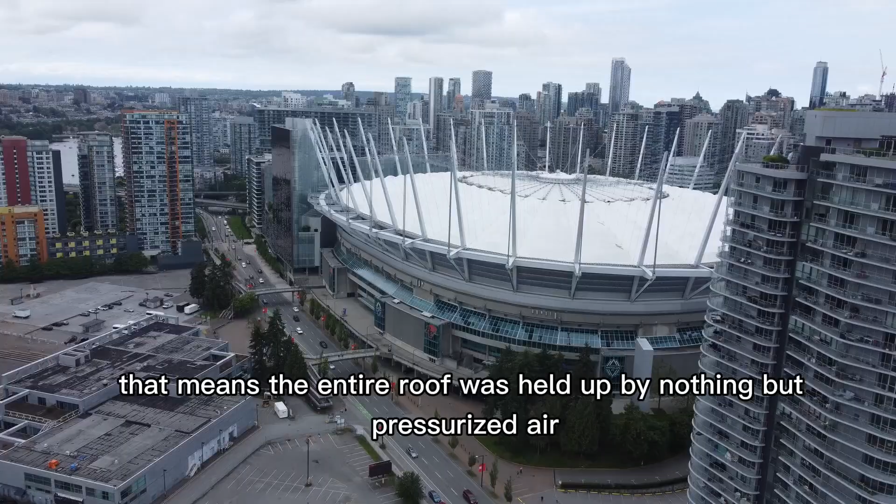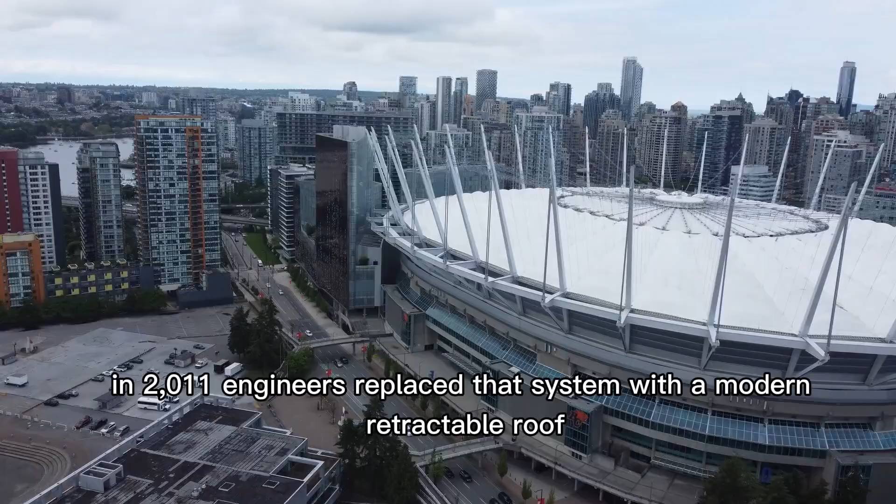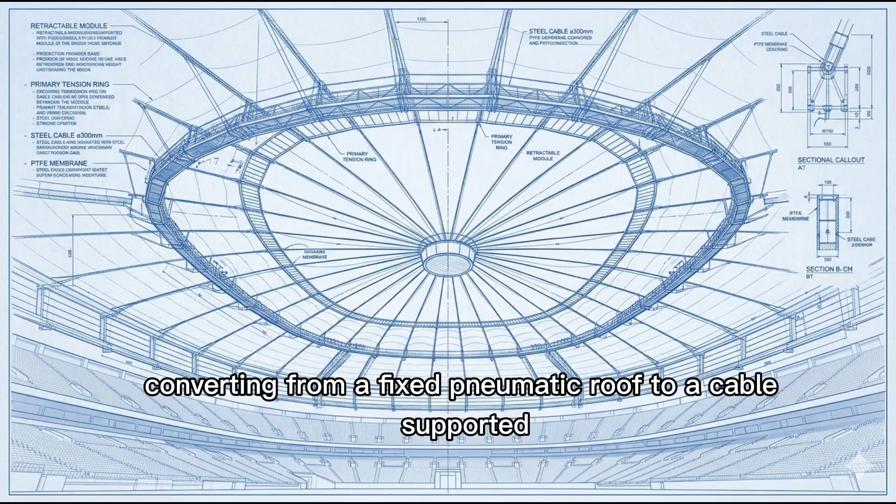BC Place originally opened with the largest air-supported dome in North America. That means the entire roof was held up by nothing but pressurized air. Essentially, the building was inflated like a giant balloon. In 2011, engineers replaced that system with a modern, retractable roof. But the legacy of that original pressure dome design still defines the structure's dimensions today. Engineering note: converting from a fixed pneumatic roof to a cable-supported retractable system without demolishing the existing concrete bowl is an extremely complex structural intervention.

Seattle, Lumen Field. Capacity approximately 68,000. This stadium is notorious for one thing among engineers: noise concentration. The roof structure, partially enclosed on 3 sides, acts as a parabolic reflector. Sound doesn't escape. It bounces back onto the field. NFL players have described playing here as disorienting. The crowd becomes a structural element.

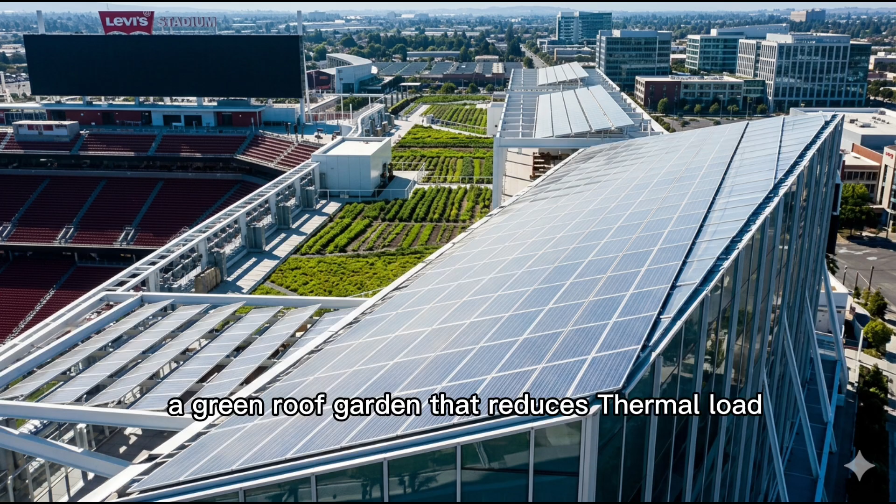Levi's Stadium, Santa Clara. Capacity, 68,500. Silicon Valley built a stadium, and it shows. This venue was designed from day one as a smart building. 5G infrastructure embedded in every section, a green roof garden that reduces thermal load, and a solar panel system that generates more electricity than the stadium consumes on event days. Levi's Stadium is, energy-wise, net positive. That's exceptionally rare for a venue this size.

And then there's Los Angeles, SoFi Stadium, $5.5 billion. The most expensive stadium ever built on Earth. But here's the problem FIFA handed the engineers. The NFL field inside this building is too narrow for football. FIFA requires a pitch exactly 105 by 68 meters. SoFi Stadium's NFL configuration was about 4 meters too tight.

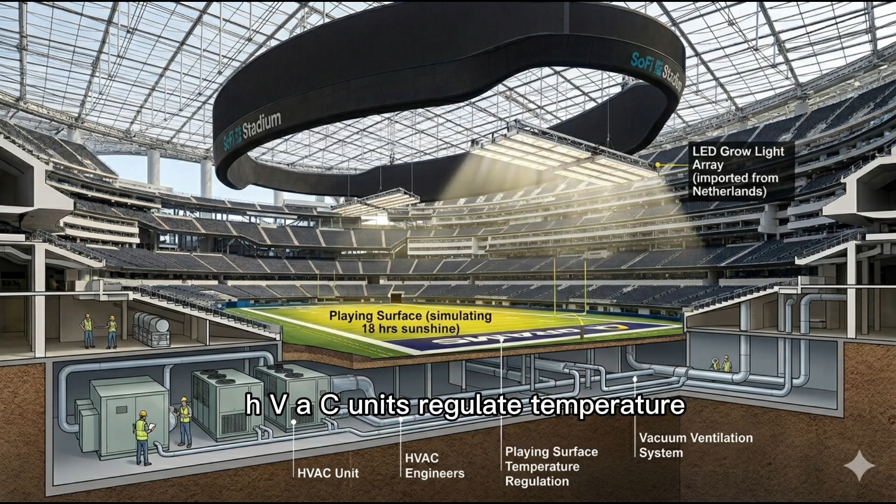The solution? Remove over 400 seats from the corner sections, physically dismantle part of the structure, and then grow real grass inside a semi-sealed building with no direct sunlight. The engineers installed a vacuum ventilation system beneath the pitch. HVAC units regulate temperature across the playing surface. Giant LED grow lights shipped in from the Netherlands simulate sunlight 18 hours a day.

And above all of that, suspended 122 feet in the air, hangs the Samsung Infinity Screen. 70,000 square feet, 80 million pixels, the largest video display of any stadium on the planet. Its brightness is strong enough to be visible through the translucent ETFE roof, from aircraft descending into LAX. SoFi Stadium isn't just a venue. It's the most complex temporary engineering transformation in World Cup history.

Guadalajara, Estadio Akron. Capacity, 49,850. Look at this building from the outside. The exterior cladding was deliberately designed to mimic volcanic rock, a tribute to the region's geological landscape. Those panels are not standard concrete or steel. They use a specialized textured composite system to achieve the visual weight of volcanic basalt while keeping the structure lightweight. Mexican fans call it the volcano. Engineers call it a facade engineering challenge.

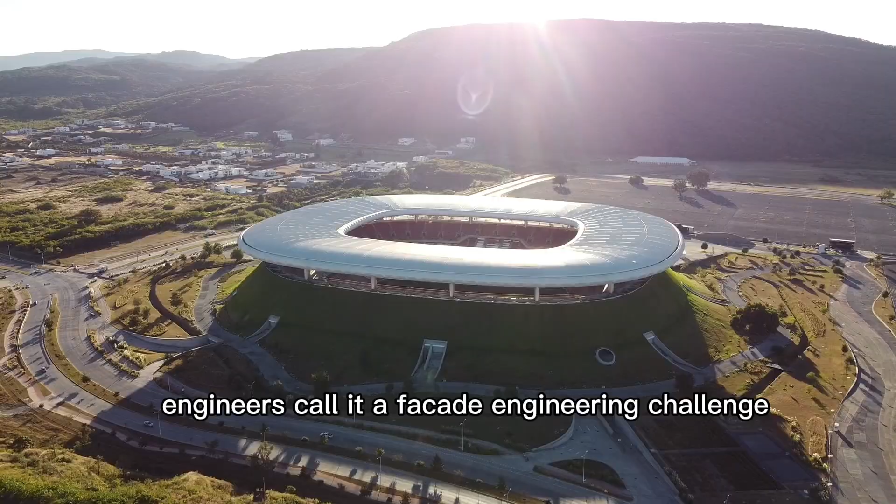Monterrey. Estadio BBVA. Capacity 51,000. Nickname El Gigante de Acero, the Steel Giant. This stadium is positioned with surgical precision. The main grandstand opens to a direct sightline of the Cerro de la Silla mountain. That wasn't accidental. The architects oriented the entire structure so the mountain becomes the backdrop for the main camera angle. Every broadcast shot from Monterrey will have a 1,800-meter mountain in the frame. That is not engineering. That is landscape architecture as stadium branding.

Mexico City. Estadio Azteca. Capacity 87,500. This stadium first hosted a World Cup in 1970. Then again in 1986, the year Diego Maradona scored both the hand of God and the goal of the century on this pitch. In 2026, it becomes the first stadium in history to host 3 World Cups. But it almost didn't make it.

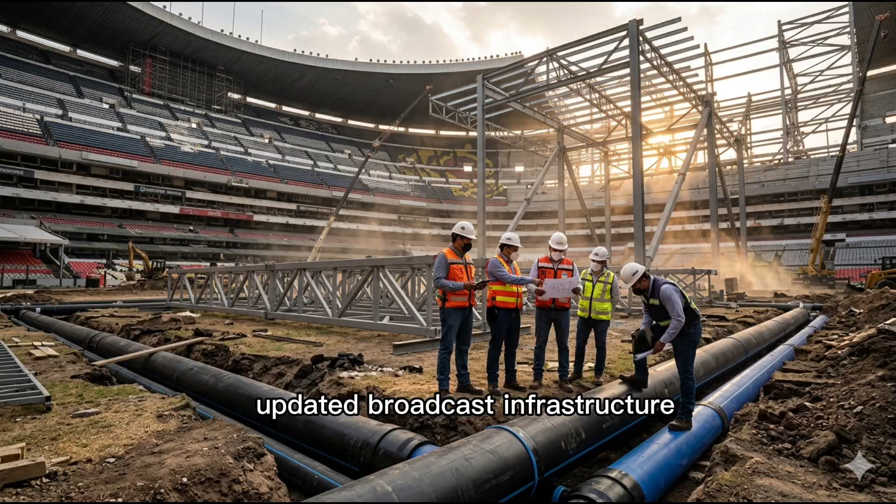In May 2024, Azteca closed entirely for what became a 665-day full renovation. Engineers had to modernize a 60-year-old structure to FIFA's current technical standards. Better sightlines, new drainage, updated broadcast infrastructure, while preserving the historic architecture. It reopened on March 28, 2026, just in time. It hosts the tournament opener, Mexico versus South Africa, June 11th.

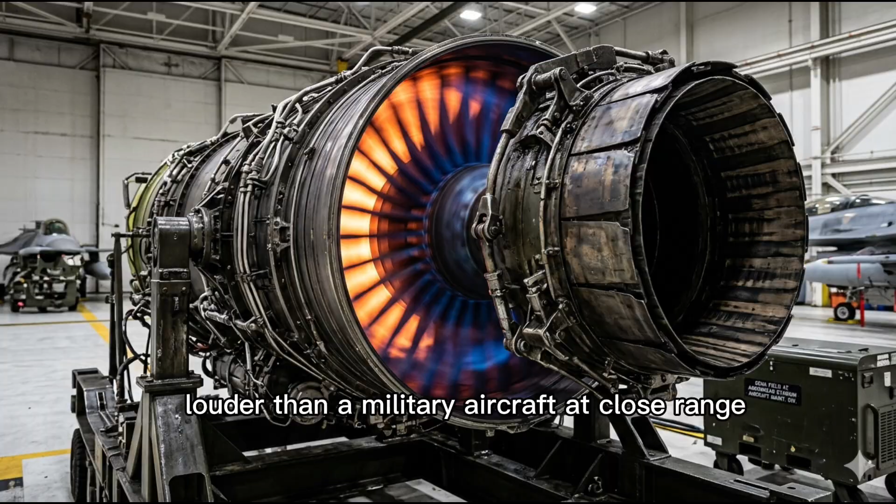Kansas City. Arrowhead Stadium. Capacity 76,416. This building holds a Guinness World Record. 142.2 decibels. That is louder than a jet engine at takeoff. Louder than a military aircraft at close range. It is the loudest crowd noise ever officially recorded at any sporting event, anywhere in the world. And it was engineered to be that way, deliberately.

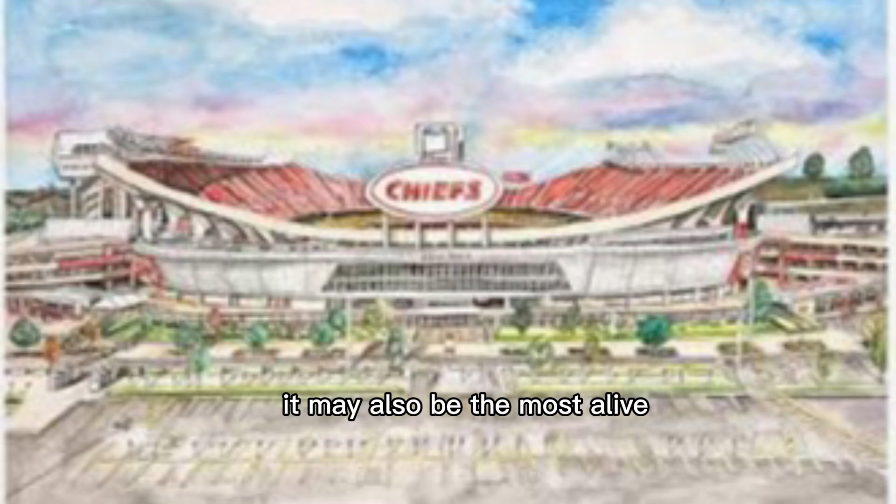When architect Charles Deaton designed this stadium in 1972, he rejected the standard circular bowl that every other stadium was building. His reasoning was simple. Humans are not angular. Instead, he designed organic, asymmetric curves that concentrate and redirect crowd noise downward, back onto the field. The steep upper deck follows what engineers call a clear line of sight strategy. Maximum sightline quality at maximum acoustic impact. It opened in 1972 and is the oldest venue at this World Cup. It may also be the most alive.

Houston. NRG Stadium. Capacity 72,220.

This was the first NFL stadium ever built with a retractable roof, back in 2002. The 4-acre canopy opens and closes in under 7 minutes. But for the World Cup, that roof created an engineering problem. No direct sunlight, no natural grass. The solution arrived in refrigerated trucks from Denver, Colorado, where the Tahoma 31 Kentucky bluegrass had been growing for 18 months specifically for this tournament.

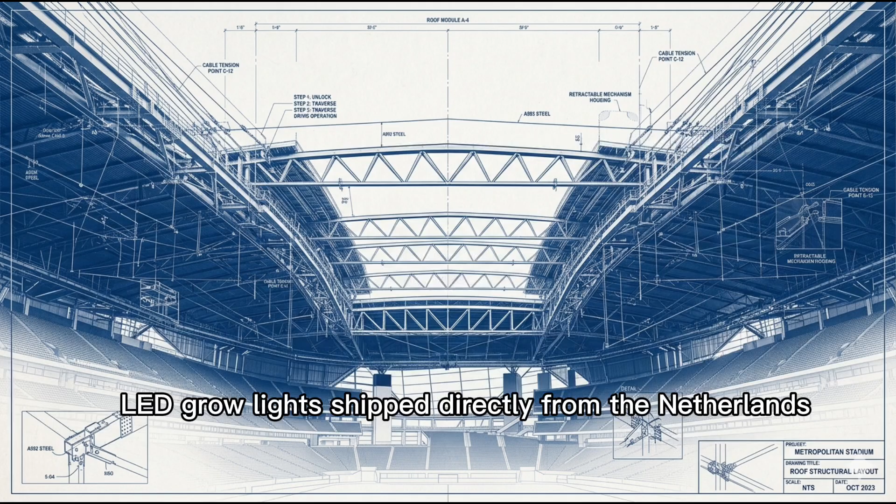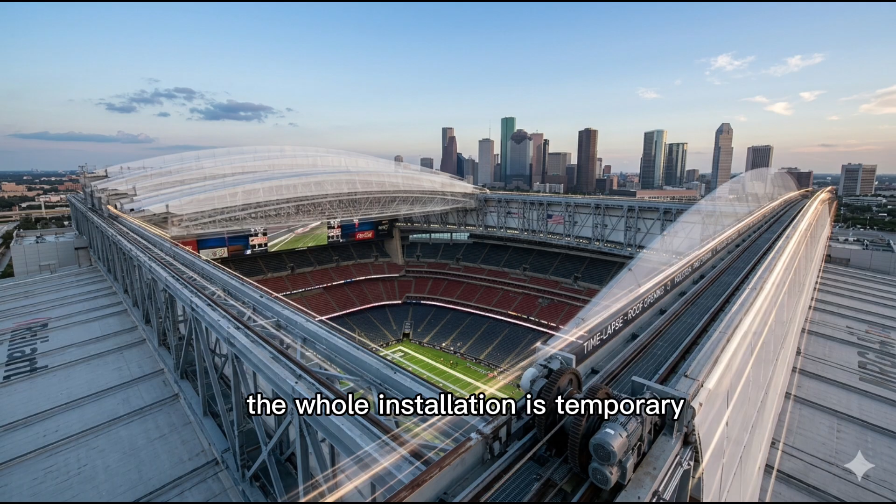81,000 square feet of grass laid in engineered layers, drainage, stability matrix, temperature control. And to keep it alive under a closed roof, LED grow lights shipped directly from the Netherlands, running up to 18 hours a day. After the last match, the entire pitch will be removed in under 2 weeks. The NFL comes back. The whole installation is temporary. The engineering is anything but.

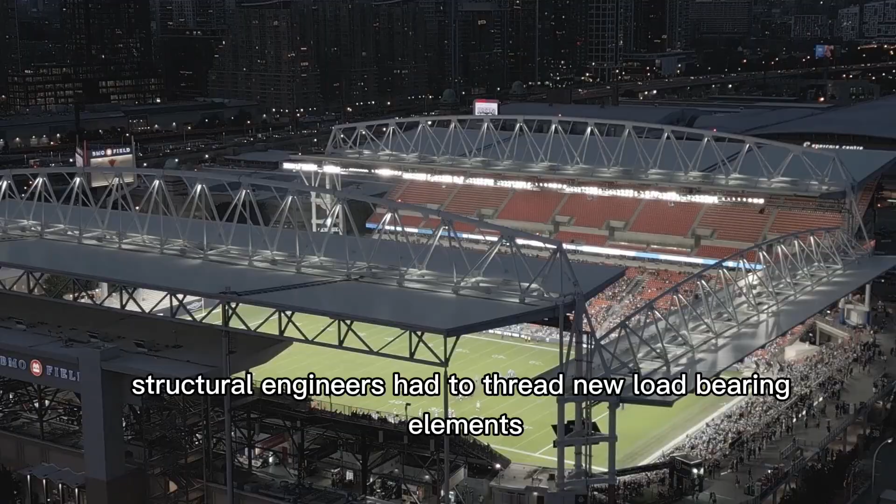Toronto. BMO Field. Capacity 45,736. The smallest venue in this World Cup, but arguably the most meaningful to a nation. This is Canada's first ever Men's World Cup match on home soil. The stadium was expanded specifically for this tournament. Additional seating rings integrated around an existing MLS scale venue. Structural engineers had to thread new load-bearing elements through an already standing building without pausing normal operations. Small stadium, enormous history.

Gillette Stadium, Foxborough, Massachusetts. Capacity 65,878. And now, something you have never seen at any football stadium on Earth. Look behind that goal. That is a lighthouse. 218 feet tall, full 360-degree observation deck, built as a permanent structural feature of the stadium. There is also a bridge spanning behind the northern end, part of the same architectural concept.

Architect Populous designed this as a deliberate statement about New England maritime identity. It is pure architectural theater. But from an engineering standpoint, integrating a 218-foot vertical tower into a stadium's lateral load system without compromising the seating bowl geometry took serious structural calculation.

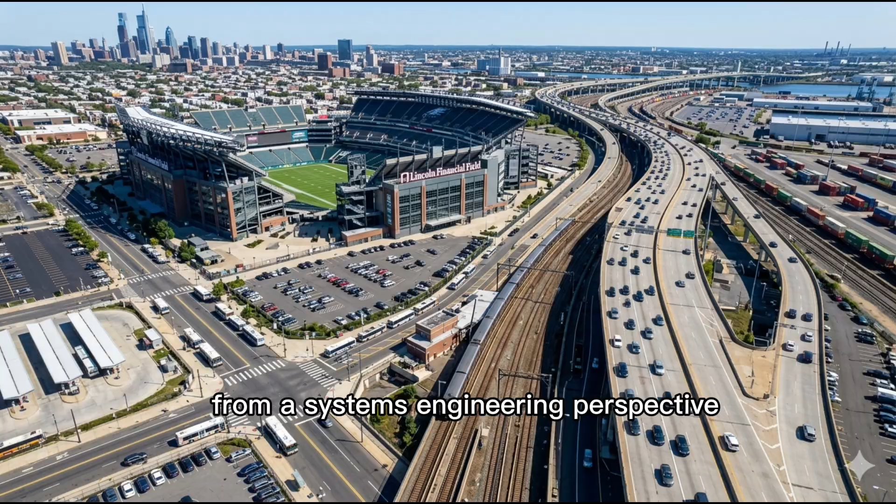Philadelphia, Lincoln Financial Field. Capacity 69,000. The most transit-accessible stadium in this entire World Cup, ranked #1 across all 16 venues for public transport connectivity. From a systems engineering perspective, that matters. Moving 70,000 people in and out of a venue safely and efficiently is a logistics problem as much as an architectural one. Philadelphia solved it better than anyone.

Hard Rock Stadium, Miami. Capacity 65,326. One of the few venues that required no grass conversion. The natural Bermuda grass already in place met FIFA standards. This stadium hosts the World Cup Bronze Final. But for most of the year, it also hosts Formula One. The Miami Grand Prix circuit runs around and through the stadium complex. When you see the track layout, you realize just how much multi-sport infrastructure engineering went into this site.

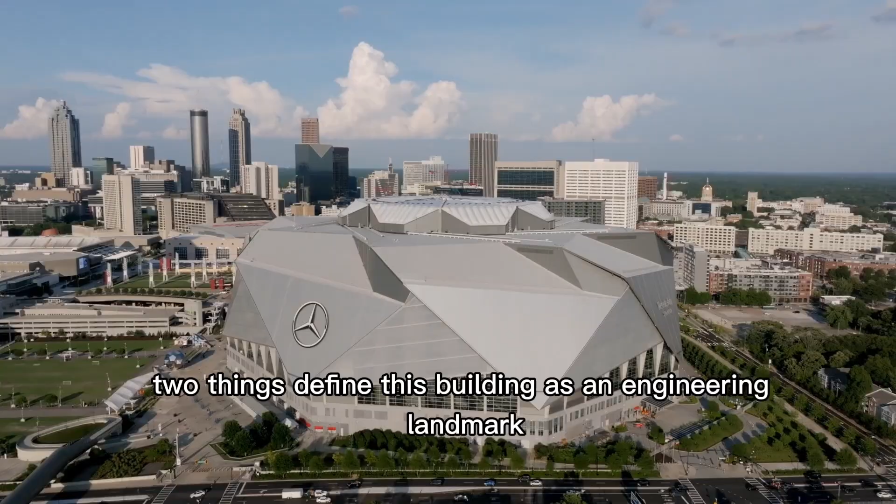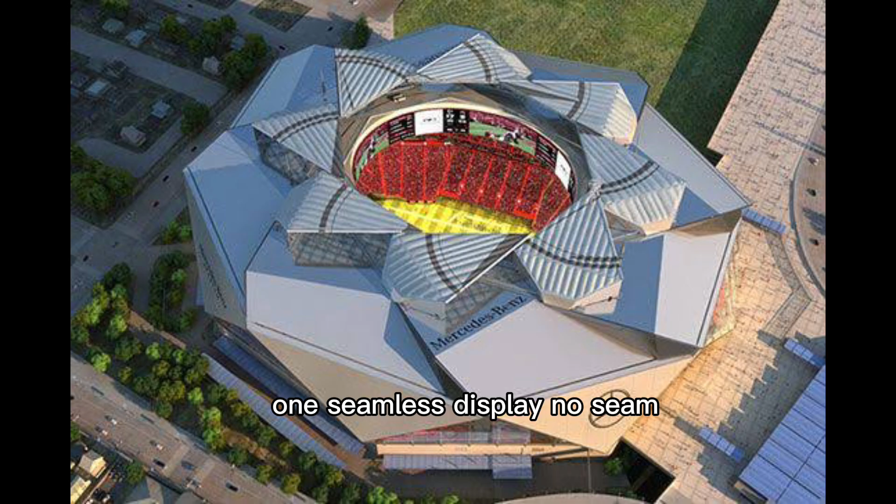Atlanta, Mercedes-Benz Stadium. Capacity 74,295. Two things define this building as an engineering landmark. First, the halo board, a 360-degree continuous LED ring, 58 feet tall, running the entire circumference of the stadium's interior. One seamless display. No seam, no break, no interruption. At the time of installation, the largest LED display in the world.

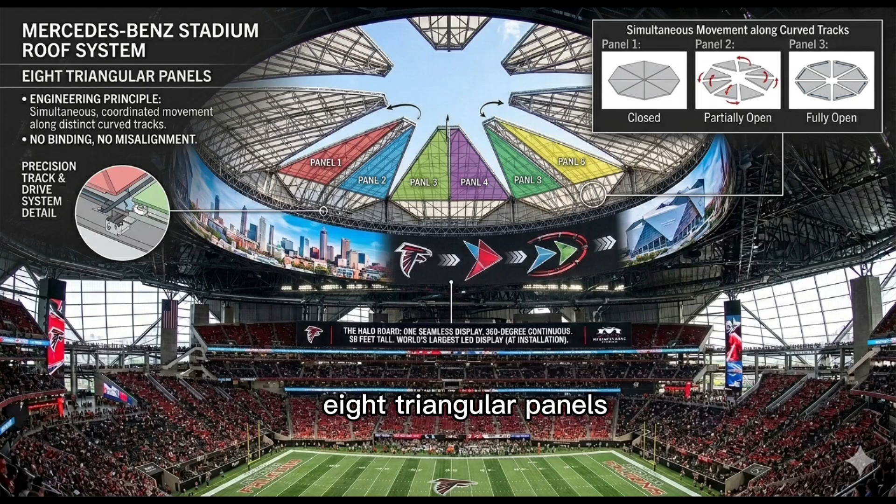Second, the roof. 8 triangular panels open and close like a camera aperture or the iris of an eye. The engineering required each panel to travel along a curved track simultaneously, without any of them binding or misaligning. This stadium also operates on 100% renewable energy, with over 4,000 solar panels on site. It hosts a World Cup semi-final, and it deserves the stage.

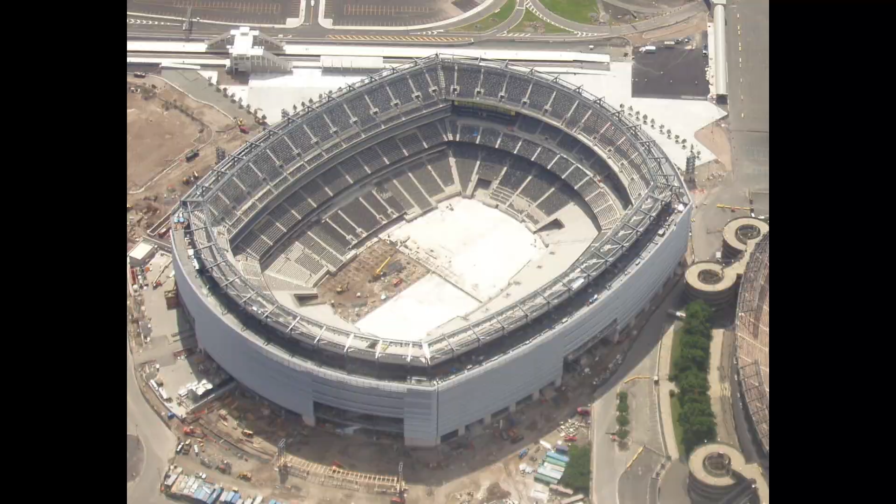MetLife Stadium, East Rutherford, New Jersey. Capacity 82,500. The World Cup final is here, July 19, 2026. And the grass that players will walk onto for that final? It started growing 10 months ago at a farm outside Charlotte, North Carolina. FIFA's pitch team selected Tahoma 31 Bermuda grass after nearly a decade of research across 16 different climate zones. The sod traveled north in 20 refrigerated trucks.

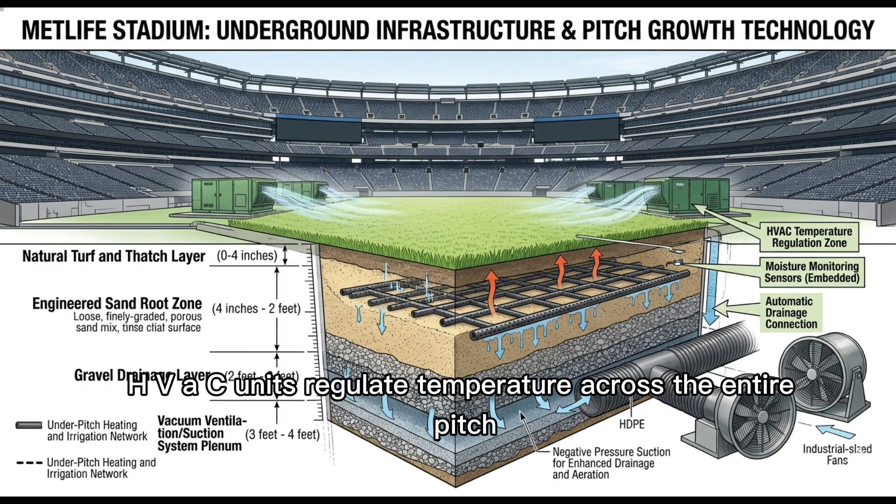Beneath the surface, 2 feet of engineered sand, a full irrigation network, and a vacuum ventilation system. HVAC units regulate temperature across the entire pitch during the growth phase. A specialized stitching machine welds individual grass sections into one continuous surface. This is not laying turf. This is building a precision-engineered playing system designed to perform at the highest possible level on the most watched day in football.

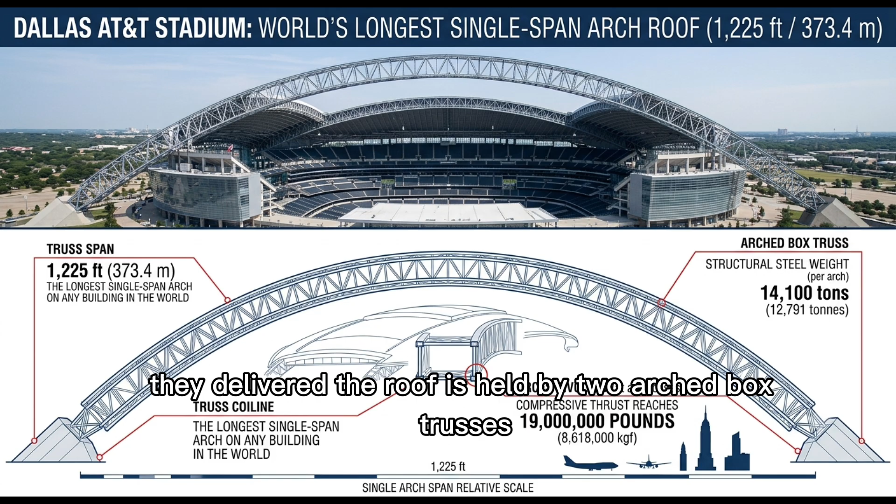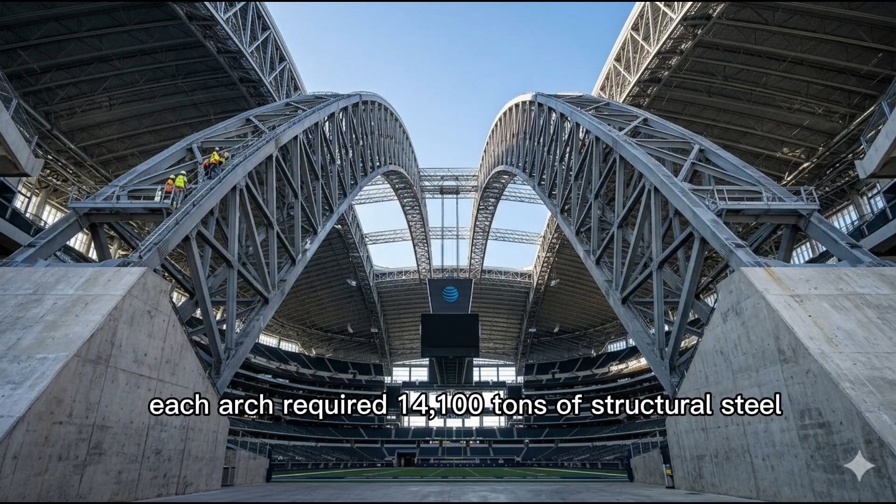Dallas, AT&T Stadium. Capacity 94,000. The largest venue in this World Cup, and the host of 9 matches, more than any other stadium. The engineers who built this had one goal: the largest enclosed structure on Earth. They delivered. The roof is held by 2 arched box trusses, each spanning 1,225 feet. That is the longest single-span arch on any building anywhere in the world. Each arch required 14,100 tons of structural steel. The forces involved reach 19 million pounds.

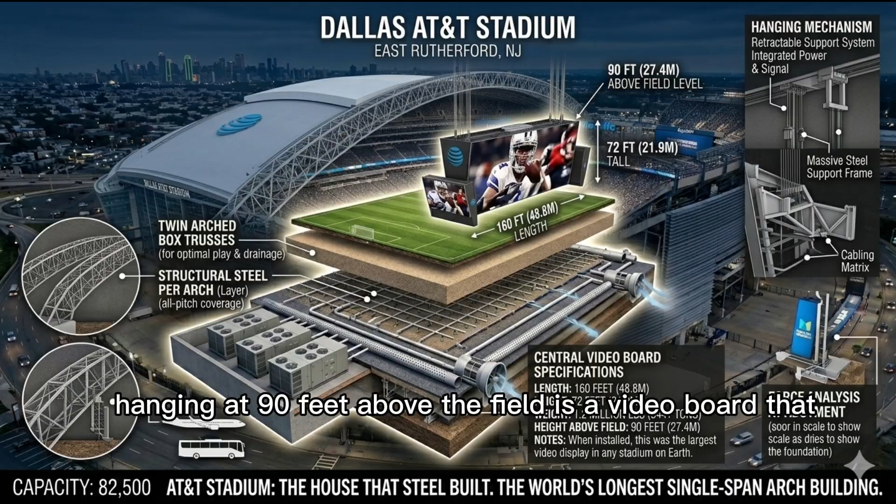The retractable roof opens in 12 minutes. Hanging at 90 feet above the field is a video board that, when installed, was the largest in any stadium on Earth. 160 feet long, 72 feet tall, weighing 1.2 million pounds. And the nickname? The Death Star. Look at it from the air. You'll understand why.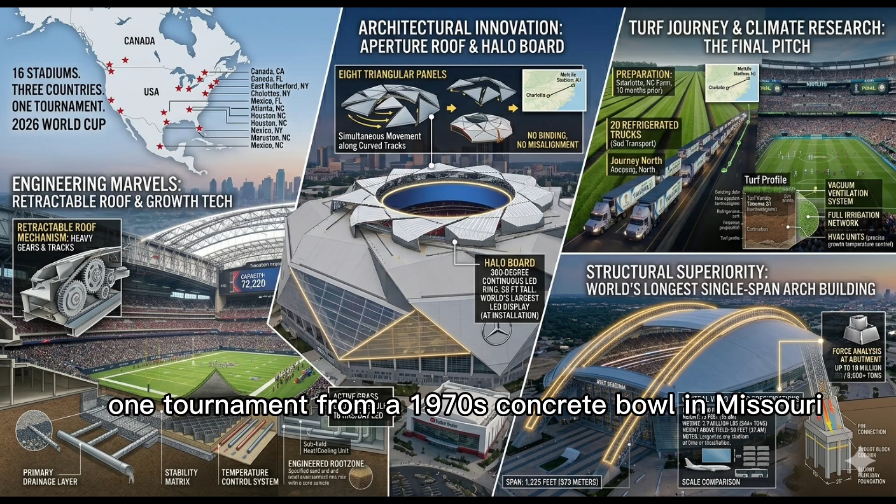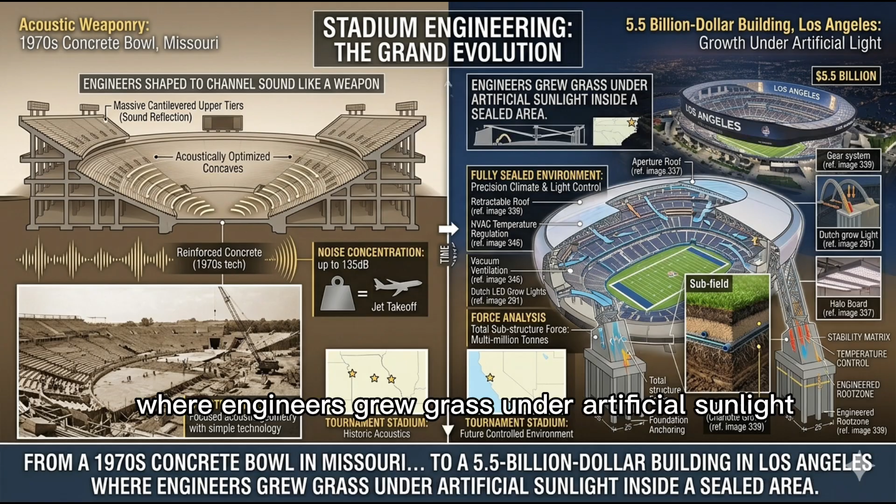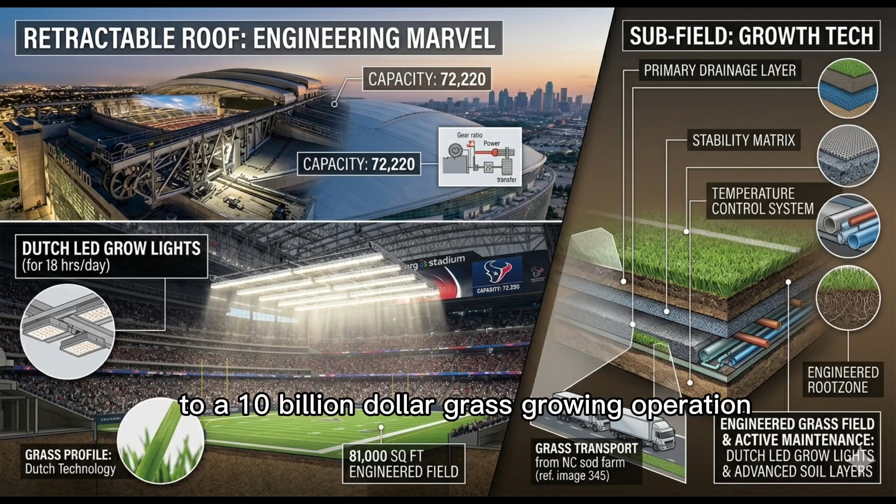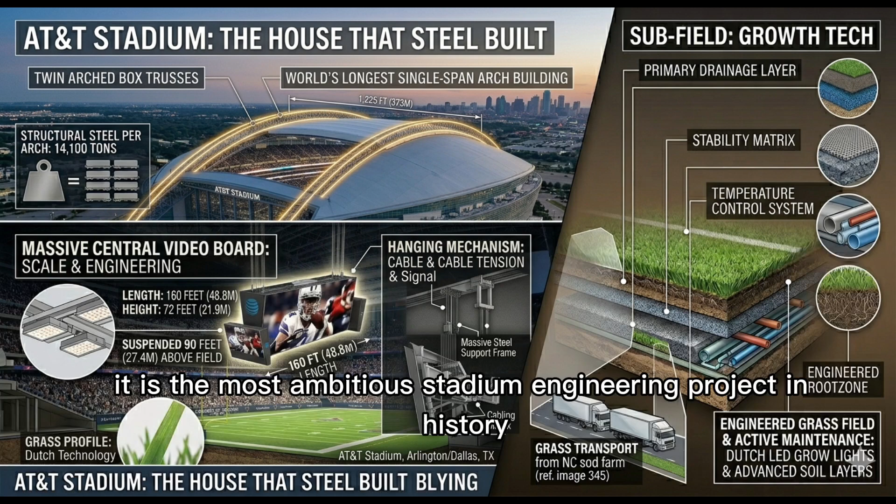16 stadiums, 3 countries, 1 tournament. From a 1970s concrete bowl in Missouri that engineers shaped to channel sound like a weapon, to a $5.5 billion building in Los Angeles, where engineers grew grass under artificial sunlight inside a sealed area. From Mexico City's Azteca, carrying 60 years of football history into its 3rd World Cup, to a $10 billion grass-growing operation that shipped turf in refrigerated trucks across an entire continent. What FIFA built for 2026 is more than a football tournament. It is the most ambitious stadium engineering project in history, and the matches haven't even started yet.